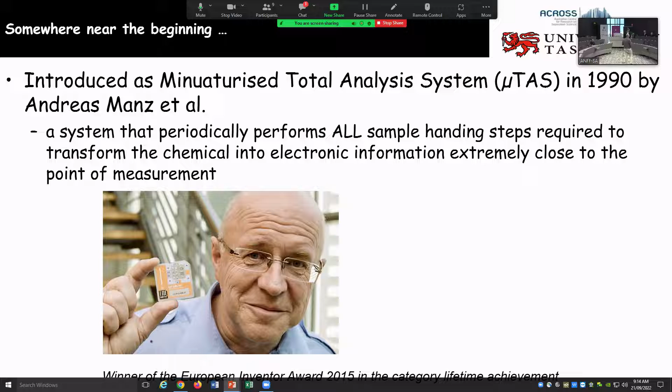And in that you're going to have lots of little people, and those little people are going to be doing all the things that you would do in a chemical laboratory. So that's the dream, is to take that integration of what happens in the microelectronics industry and do exactly the same for the chemical and microbiology industry, because if we can do that, we can save the world in so many ways.

There's a few reasons why we want to do this. If we scale everything down, it becomes so much quicker, because obviously if you run a kilometre race, it takes longer than running 100 metres, and it takes less time to run 100 metres and less time to run 10. So if we make everything smaller, everything happens quicker.

Because it's really small, it's really portable, so we can take it wherever we want. It's hopefully really cheap if we can scale up all of those things from the microelectronics industry, which make our mobile phones and computers really cheap and usable today.

We can use really tiny volumes, and by tiny volumes, we're talking microlitres or even nanolitres. We don't need to sample hundreds of litres of something, we only need very small amounts, and that's really advantageous if you have something where you only have a really small amount, such as inside a cell. Ideally, if you get all of this right, it can be used by anyone, anywhere, at any time. That's the dream. The reality is that we're often a long way away from the dream, but we are getting closer.

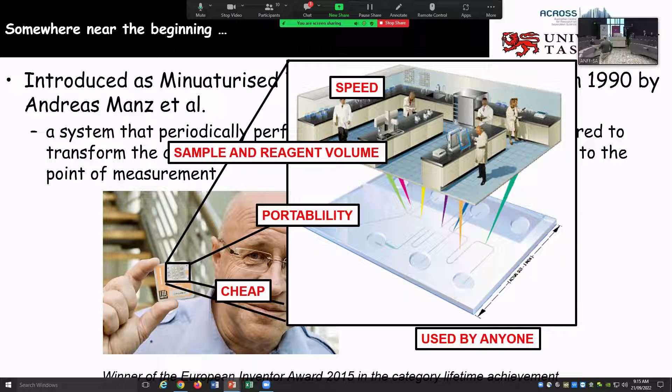This is all real-time, so it now gives you the chance to monitor brain chemistry in real-time. Because it's really quick, it's real time. Because it's really small, you can actually stick it in a little backpack on the rat. And because it's really small, it doesn't use very much of the rat's fluid to be able to do that. So all of those advantages that I talked about.

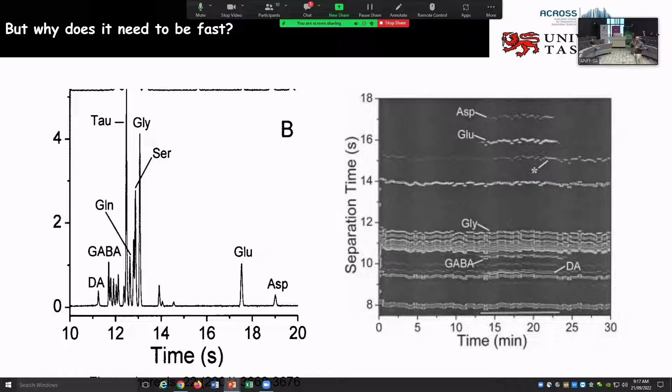Now, I don't know about you, but I don't have $500,000 to build one of these. I'd like $500,000, but even if I had it, I wouldn't build one of these, I'd do something else. But if you're looking for life on Mars, this is the only way we're going to get there, because all the other stuff they've sent so far is not fit for purpose.

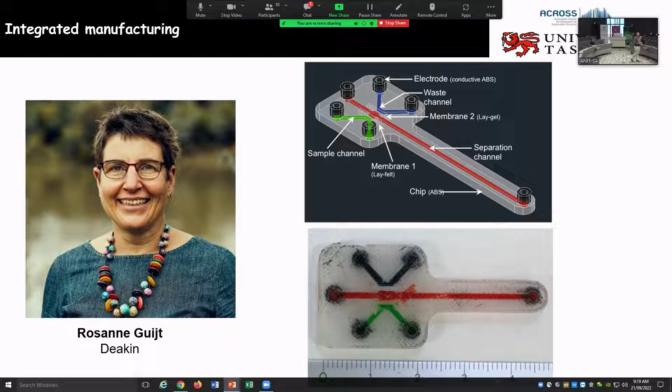This is some work we did with her on 3D printing, being able to manufacture something with 5 different materials in it at the same time, which means we can actually eliminate a lot of the manufacturing steps, some of which you'll see at ANFF here today. The only problem is we can generally make 1 or 2 of these at a time, as opposed to what you'll see here, where you might be able to make hundreds at a time. So different scales, but perhaps different purposes at this point in time.

One of the other major challenges is how to move all of these things that we want in there—fluids, in particular cells.

There's also some other unique phenomena that occurs around surface fouling, so that you don't have any problems with protein sticking, which is also a pretty neat byproduct of what they were trying to do.

An even easier approach is to use something that has been around for decades, and that is capillary action. In my field as an analytical chemist, we used to do paper chromatography. You've probably all done that, where you put a drop of ink on a piece of paper and put it in some liquid and the colours run off the page, and you can separate black into blue and green and yellow. Same thing here.

We can do exactly that same process and use the capillary forces in the paper to move fluid. Paper chromatography was old in the 90s, and then someone decided to do this for microfluidics, and all of a sudden it became really popular.

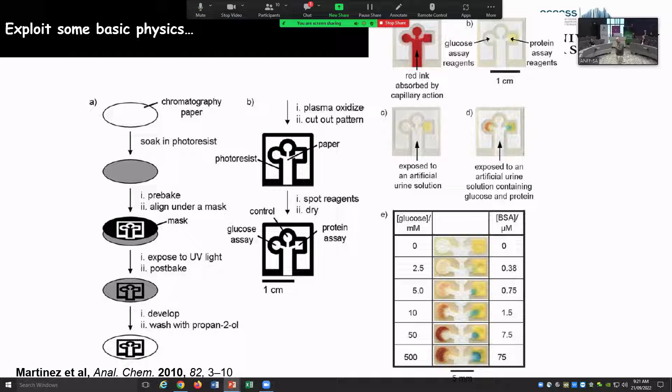There are some things, though, that I don't think you'll ever be able to do on paper. Maybe I'll be wrong, but I think paper does have some limitations, though it is still useful. This is one of my favourite papers.

So when you put blood on there, it will now tell you whether you're A positive or O positive or A negative. I don't know all my blood groups, I don't know what they all are, but the paper will tell you. And that's really neat, because if you're in an emergency situation, you don't have to interpret—you can just read the answer, right?

It's completely intuitive. And they've also extended this now to heavy metal detection. Depending on what you can see—if you can see the colour, if you can read the copper—you've got a copper problem.

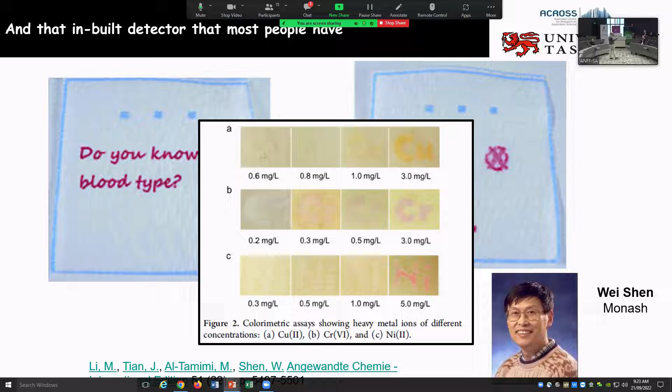So again, making really simple, really intuitive measurements using our eyes here. We get rid of all that lab-on-a-chip-in-a-lab syndrome, because we are the lab, right? We've all got eyes, and the other thing we've all got these days are mobile phones.

Conor Hogan at La Trobe started using a phone to do a lot of these things with microfluidic devices. In this case, he's doing light generation using the audio output from the phone. That's more of a problem these days, given that most phones don't actually have an audio output anymore, it's all Bluetooth. Then using the camera and also the audio input to get the measurements back in.

That's really cool, but the problem, as I've alluded to, is that as phone makers keep changing the phones, we've got to keep changing how we use them, and that's challenging sometimes for us to just keep up with how things are changing.

That's really neat because you can do things like look at really small things up close and have really bad pictures taken, like Craig is illustrating there wonderfully. Doing that, you can do some liquid extraction. Craig has done work extracting minerals from a water processing stream into an organic acceptor stream, maybe being able to use this for mining or refining purposes.

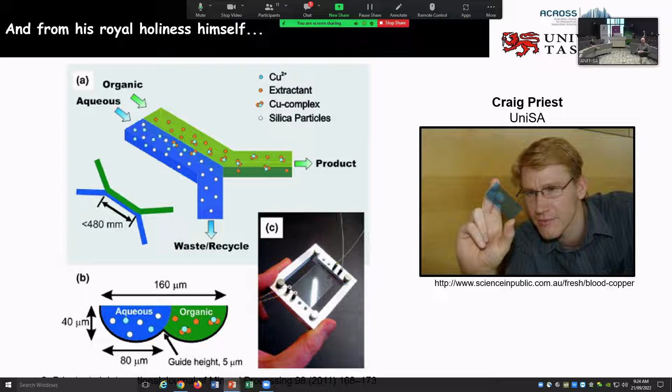And then you go, well hey, it's really small. And actually, it doesn't matter if it's really small, I can make a billion of these really easily. So then I can get to large scales, and my physics, my laminar flow, stays exactly the same.

I saw this first, I think, in about 2005 or 2006, and at that time the first babies from this had been produced. The company, I believe, did spin out after that, and I think it's still successful, but I honestly haven't kept track of that side of things. Still, I think it's one of my favourite examples of really simple fluidics.

It gets more complicated than that, and because again it doesn't mix, we can do things like creating an artificial spleen. This is for removing bad things from blood. We can put something in there that has a magnetic particle on it, which attaches to the bad things, the pathogens, the toxins, and using a magnetic field we can strip them from the blood into that acceptor stream.

Because it's laminar, the blood just goes straight back out again. We don't have to dilute it, we don't contaminate it, and it's really neat.

This was actually funded by a very large grant in the US for military use. How do you treat someone in the field? It has to be really small, really portable, really simple, right? You can't take ten litres of blood to give them an infusion, you have to use what you've already got there.

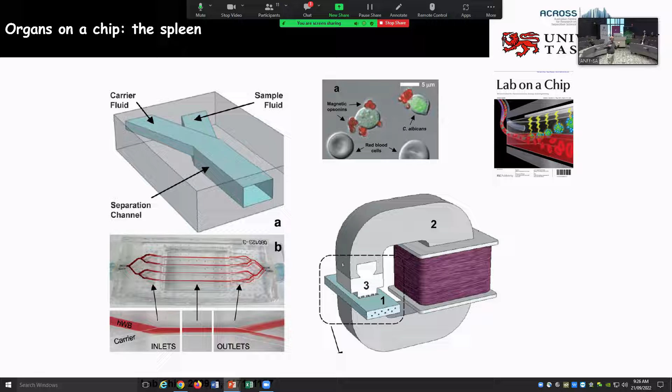That has spurred a whole new area now called organs on a chip, tissues on a chip, humans on a chip. The Human on a Chip project is designed to take every functional part of your body and put it on a microfluidic device, or a series of microfluidic devices, so you can connect them all together exactly the way they work in our body. Then we can start doing experiments not on people, not on animals, but on microfluidic devices. There's still a fair way to go, but we're getting much closer, and maybe one year I'll actually have a picture of what that looks like. It'll probably be pretty big for the moment, but I think before I'm dead we'll probably have that somewhere.

In Queensland, in terms of tissues on a chip and culture on a chip, Justin Cooper-White is doing some really nice things with stem cells. These were very interesting about a decade ago - one of the neat things they were doing was looking at how stem cells evolve. They would culture stem cells in a series of chambers all interconnected, and as the first stem cells would change, the chemistry those cells released would influence how the next cells evolved and changed, and the next cells after that. So they were looking at how stem cells evolve into different types of cells in our body, and how the previous cells or the microenvironment around them influences that. That's really easy to do on microfluidic devices because we can look at individual cells, control all the chemistry nicely, and cascade them in any way we'd like.

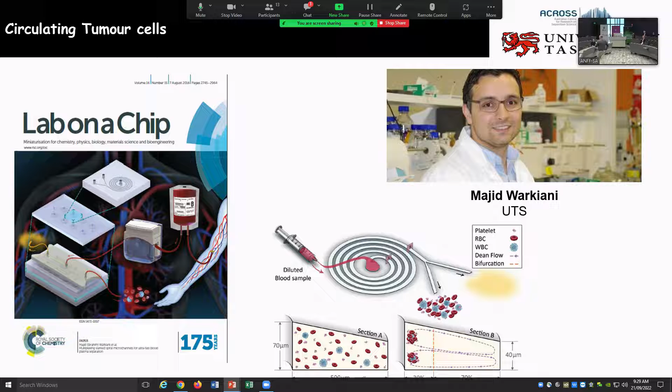Also speaking of cells, Majid Warkiani at UTS has been doing some really nice work on circulating tumour cells. These have been recognised as an important part of the spread of cancer, particularly after you've had surgery and had your cancerous tumour removed. What they have now is a device, or series of devices, that have been commercialised to actually remove all of the circulating tumour cells from your blood after surgery. They'll connect you up to about 10 microfluidic devices stacked on top of each other, and over the course of a couple of hours your entire blood is filtered through this, removing 100% of the circulating tumour cells to hopefully stop and minimise the risk of the cancer spreading throughout your body. That's commercial - I don't know how viable the company is, but I think they'll do really well because it's a market that's not going to go away anytime soon.

Also separating particles and cells is David Inglis at Macquarie, using what's called little posts. These posts are offset and called bump arrays, because as your particles follow flow streams and hit a post, it moves a little bit to the side. So you progressively bump particles of different sizes into different parts of your device, and you can separate particles based on size.

Recording stopped. Uh-oh, what did I do? Wasn't me, I didn't touch anything.

We can even do chemistry too, so that's all around particle analysis. This is a really old example now of doing chemical reactions in microfluidic devices. That's nice because as you scale everything down, everything gets quicker - reactions that take hours can now be done in seconds. We can do them in series, adding different reagents at different time points, and automate the entire chemical synthesis process.

Hey, you broke my slide changer. What did you do? Sabotage - I was giving them nice compliments about being professional. Yeah, you probably deserved it, Michael. Is it working now? Yeah, it's working now.

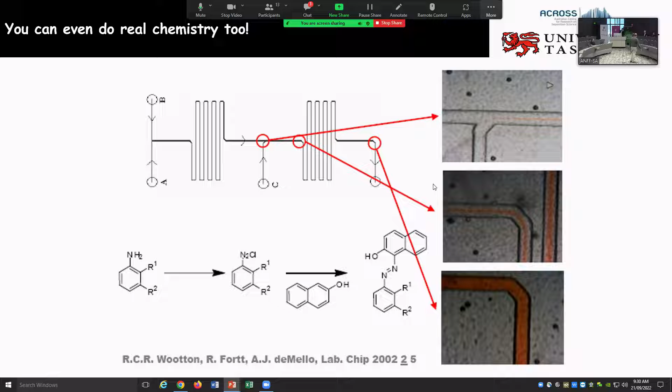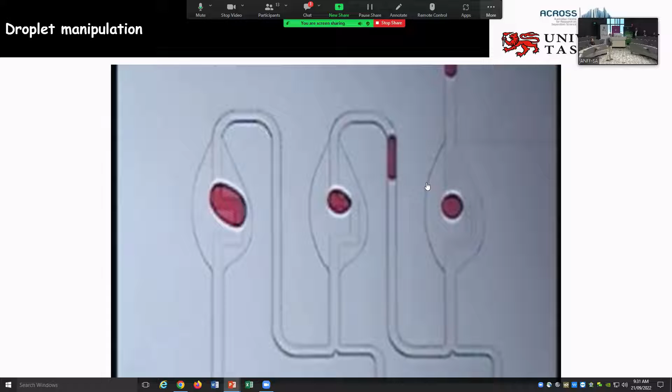You can capture drops—1, 2, 3, 4 drops, however many you want—and then sequentially release these drops or access whichever ones you would like. So you might do some reactions, and whichever one shows the products, you can access and analyse or do something else with.

And you can't just do that on one, you can do that on millions of drops. So the droplet rate, the rate at which droplets are generated, is typically 100 drops a second, up to about 1,000 to 10,000 drops a second.

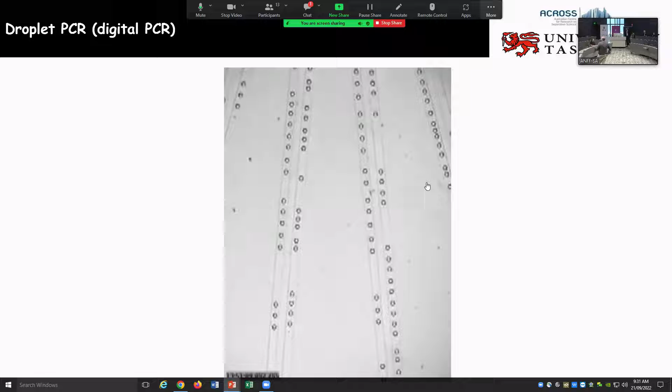You can do individual reactions in each of these droplets, which is pretty exciting given that each of them is completely separate until you decide to put them all together again. We decide what happens by the design that we use.

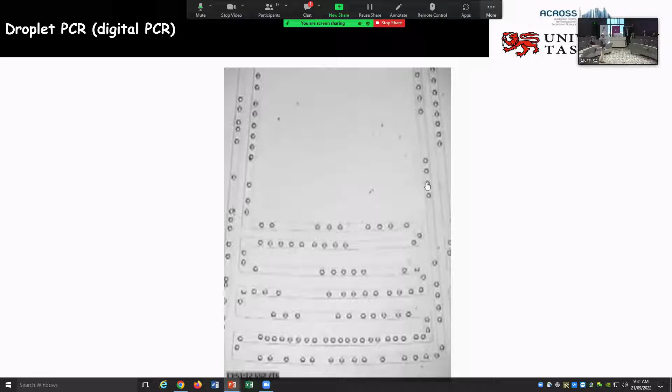One of the areas this has become really important is DNA testing. One problem in a rape case, for example, is trying to find that 1 or 2 sperm cells among millions of female epithelial cells. If you separate each of those cells into its own droplet and do the analysis on each droplet, you remove a lot of the background and make identification of the sperm cells, or finding the male DNA, much, much easier.

That's come out of Berkeley, is currently commercialised, and I think is also going to be a really good product because they're not going to go anywhere soon—the number of bad people in the world doesn't seem to be getting less despite our efforts to make it so, which is a little bit of a sad reflection, I think, in many ways.

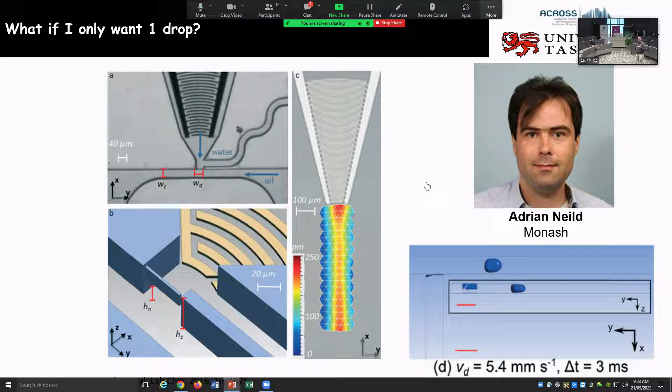If you only want 1 drop, Adrian Neild at Monash can help you with that. He uses surface acoustic waves from little electrodes, and by actuating those at particular times, you can produce 1 drop, 10 drops, however many you want, whenever you want. This is a different way of making drops, and then you can do all the other manipulations with them that I just talked about.

Also using acoustic waves is Leslie at RMIT. He's done a whole heap of things with surface acoustic waves. This is one of his earlier works, looking at centrifuging stuff, but he's done a lot of work recently in terms of droplets.

Recording in progress. How much time do I have left? I won't ask Craig, maybe I should ask Belle. Seven minutes, right? Okay, I think I'm nearly at the fun stuff anyway.

Also on droplets is Nam Trung at Griffith, who's doing some interesting things with liquid marbles. The example on the right is a drop of liquid that balls up on the surface because it's hydrophobic, and he then coats that in nanoparticles, which creates a liquid that's completely impervious.

You can then use a magnetic field to move these all around—you can use magnetic particles or a magnetic fluid. The one I saw with magnetic particles, you could actually make the particles all come down on the side of the droplet, so you could access the fluid, and then when you take the magnetic field away, the particles go back up again and seal it in.

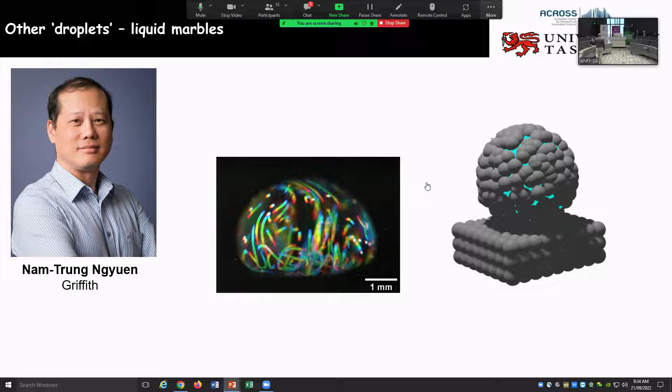Really neat stuff, but I can't find the video, so I'm going to have to contact him and see whether I can get that from him—if I ever get to do this talk again, which I probably won't because I'm bagging Craig out too much.

And so that's the basics of microfluidics.

Now I've got about 5 minutes to show you some other stuff that I think is really cool, but I'm going to give you the choice. I've got jump to end, so we can stop and pass on to Allison, or electrowetting drops, pyramids, robots, or screens. What would you like to see?

Who wants to see anything? Which one do you want to see? Someone tell me something. Robots. Robots, awesome choice. My favourite—well actually they're all my favourite, otherwise I wouldn't have them here, right?

I love the funky music. It's not my first choice.

This has come out of Harvard and the Whitesides group. It's a soft robot, the Octobot. Maybe I'll stop.

Oh no, I missed my acknowledgement slide. Can I jump to that? I of course always need to acknowledge the funding for people letting me do fun things like come here and talk to you, and that's primarily the Australian Research Council. And of course I need to thank Craig for continuing to invite me, even though I keep bagging him out every year and going harder and harder, and he still keeps inviting me. So next year I've actually got to go even harder again. And to Belle, who organises everything exceptionally well, and I don't think it would run if it wasn't for her, even though Craig thinks he's an important person.

So thank you very much. If there's some questions, I will answer them as best I can. Thank you, Michael.

You always forget. Thank you for your wonderful talk, but we would like some questions as well. So I'm just going to eat chocolate. No, I'm not going to eat biscuits. Ask Michael how to make an octobot - I don't know how to make one. Craig knows how to make an octobot. The team here knows how to make an octobot, not me.

We haven't had a question, but we have had a comment saying very cool things. Go, praise that. So there must be a question. Let's try and get one out for somebody. I guess I'm not a chemistry or a biology guy. I love that flow. Curious, we've got two mixtures side by side and they're not mixing. You still get a good bit of molecular interaction on the interface of the two?

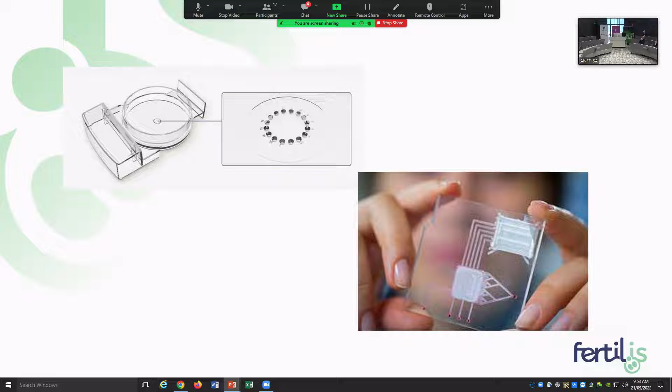Two-photon polymerization 3D printing solves these challenges.

So what's 2PP? It's based on two-photon absorption, 2PA. Essentially this is a nonlinear optical process, and what it does is it reduces the amount that is polymerized by the laser. So we use photosensitive material and a laser, and that polymerizes right at the focal point. Unlike one photon, 2PA gives us really, really small nano building blocks, which we can then use to build up a very precise structure from.

There are two types of printing modes, VAT mode and bottom-up mode. For simplicity, I'm going to describe VAT mode, which is shown here. For those familiar with filament 3D printing, it's conceptually the same except upside down. We print our part directly onto a substrate. The substrate is connected to the stage, with XY movement that allows us to print the full section of the layer. We have our Z objective, which is like our printer head, which moves up and down, allowing us to print layer by layer the different part.

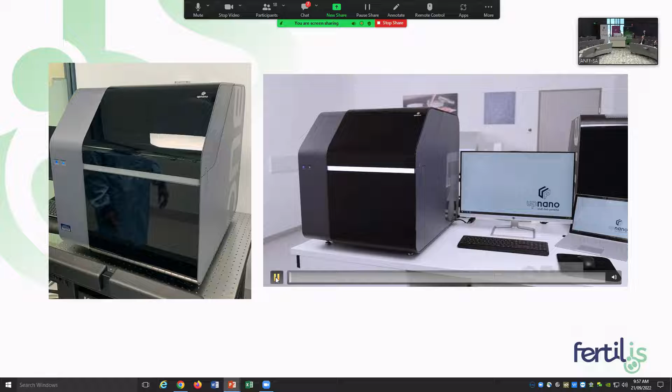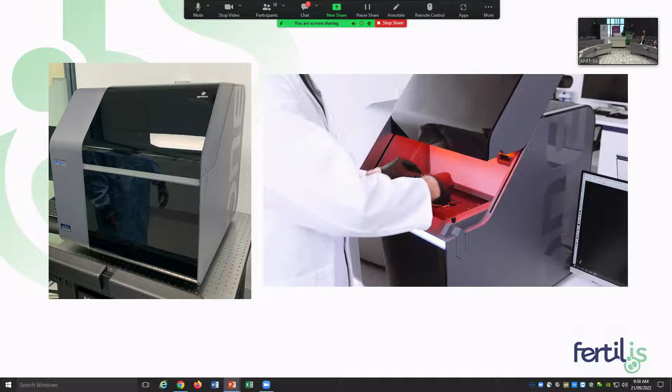Selecting an objective, placing it into the machine. The next step is to place the vat in position and then fill it with your selected material. The stage is inserted, and our substrate is that small glass piece in the middle that's positioned on the stage. It comes with software that allows you to set up your print. And then we can see the part being retrieved from the bottom here.

The Nano One is fast, with up to 100 times higher throughput for production cycles. It supports scan speeds of up to 1,000 millimetres per second and throughput rates of 450 cubic millimetres per hour, enabling both prototyping and production. It's not just the fastest in the market, it's fastest by far — it can print in 5.5 minutes what a competitor technology prints in 163 minutes. That's pretty impressive.

The Nano One comes with a range of different objectives, allowing for a range of different print sizes, as well as fine mode and coarse mode. So we can print all the way down to the 200 nanometre range, up to mesoscale parts. The laser wavelength is also compatible with cells, enabling biological printing approaches too. It supports several materials, and importantly for us, there are two biocompatible resins. It comes with proprietary software, similar to any other 3D printer, that allows you to set up your part and printing parameters.

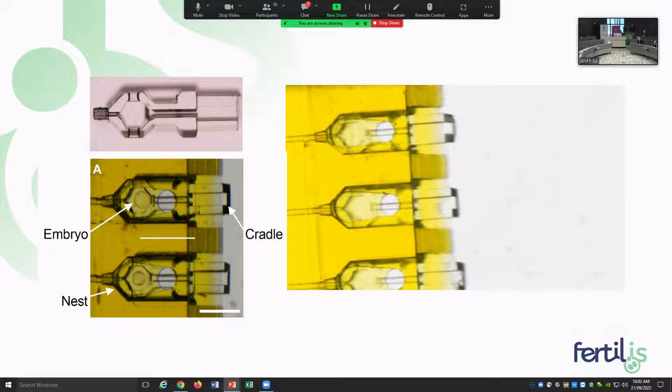This is easily my favourite part. This has to be the world's smallest microfluidic barb — 90 microns in diameter with a 30 micron nozzle. The smallest microfluidics I've worked with is 1/16 inch, so 1.6 millimetres. Stand out, this is pretty good.

We ran a computational fluid dynamics simulation to work out how the flow would go through the nozzle and then fill the cavity. What we were looking for was how the distribution of flow would work. We printed these parts on the Nano One and were able to test for fitment — how it interlocks and holds in place. We were also able to run a polystyrene bead to have a look at the flow.

Amassing images, we were able to generate this. We were pretty happy with the alignment of what we saw experimentally with what we achieved through CFD. From an applications point of view, this is really important — we're able to make sure that the embryo is evenly perfused. We're also able to substantially slow the velocity of flow, which ensures there's very little shear stress being applied to the embryo, and that's important.

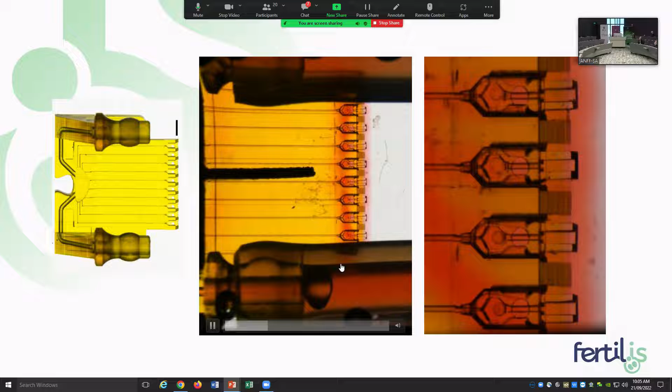This system is under flow. For reference, this is a 1.3 millimetre ID tubing. We're using a red dye to visualise the flow through the channels, and we can see the flow coming through here, but the cradles are all securely interlocked into position.

We can also see the level of control that we get out of this system. So here we're perfusing and we turn off the pump. We can see the embryos move to the left. We then subsequently turn the pump back on and we can see the embryos again shift to the right.

A few specs on the nest: it was printed in vat mode again, but this time with a 10 times objective and an air immersion medium. We were using UpNano's high-performance polymer UpPhoto, with laser power settings ranging between 50 and 100 milliwatts. Adaptive resolution printing mode was used, which achieved 4 hours and 31 minutes for one complete, fully cured part.

As with the cradles, the nest was post-processed in sequential immersion of 3 consecutive isopropanol baths. In addition, we were flushing each of the channels with isopropanol using a pump up to 3 bar. This level of precision has only been made possible by the use of 2PP.

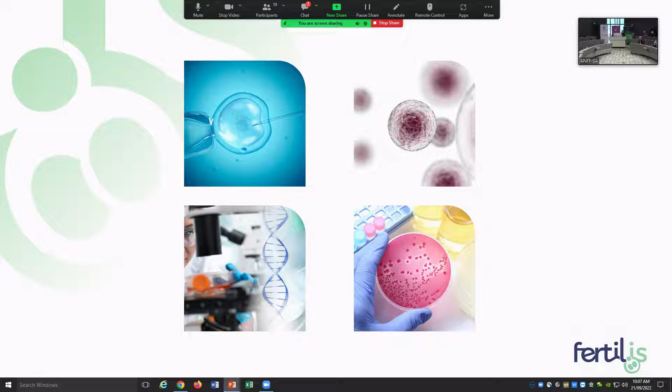Really amazing work that you're doing there at Fertilis. Exquisitely precise, and hopefully inspiring a few ideas around the room about what we can do with this new 2PP capability here at ANFF SA.

I would like to invite questions for Allison. Any questions? There's always a question, it's just whether it gets asked. All right, I'll ask a question.

So what about your journey? I'm really interested to know. It's 20 years of experience we're talking about, and you find yourself at Fertilis, which is a company that's growing very quickly, with great opportunities and wonderful technology. Can you say something about that, and also you're in Australia, which is the other thing I wanted to mention, and in Michael's presentation a lot of the researchers showcased were Australian researchers. So could you say something about microengineering in Australia and your journey, and share a bit of that?

Yeah, absolutely, I think it's really exciting. The amount of work that we do in the medical device space in Australia is fantastic. There are lots of hubs specialising in IVD or in microfluidics, and I think having the microengineering setup here is phenomenal. It's really exciting, certainly compared to many, many years back what we had at uni. The kind of access is fantastic, and it really supports innovation and being able to rethink how we do things, so that rather than just applying old techniques and old processes, we can really reconsider how these applications need to be solved.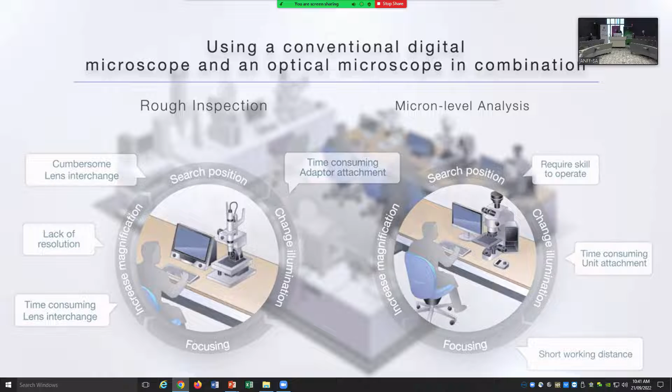The DSX-1000 all-in-one digital microscope is the tool of choice for inspection and failure analysis. With speed, flexibility, guaranteed accuracy and repeatability, and high-performance imaging software, you can be confident in your results. The DSX-1000 system has features that enhance the speed and efficiency of your workflow. Instead of having to use one digital microscope to conduct an initial low magnification inspection and a second for high magnification detailed analysis, the DSX-1000 enables you to do both on the same system. And unlike some digital microscopes that require time-intensive lens changes to switch magnification, the DSX-1000 system's quick-change lenses enable you to complete your inspection fast. Three key values for workflow innovation.

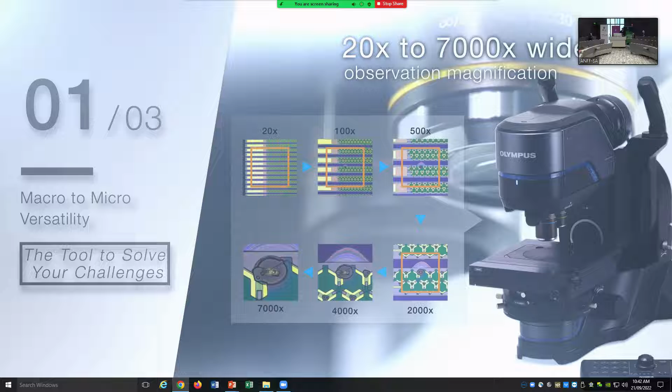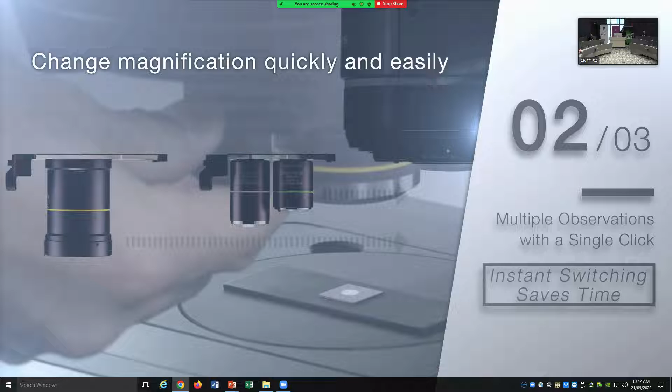During analysis, the system's suite of advanced features enable it to excel in many applications. A magnification range from 20 times to 7,000 times enables you to view a wide area before zooming down to the micron level for detailed analysis. A range of lenses is available, including for high resolution and long working distance, while the rotating observation head and stage let you view your sample from almost any angle. Multiple observation methods are also supported. The Best Image function enables you to view your sample under 8 observation methods on one screen, so you can quickly choose the one that works best. And all magnifications are available in every observation method.

High-resolution 3D images are also possible, with speeds up to 10 times faster than the previous DSX model. Unlike some digital microscopes, the DSX-1000 system's measurement accuracy and repeatability are guaranteed, so you can be confident in your results. The telecentric optical system corrects for the convergence effect that can make the size of an object look different depending on the focal point, greatly increasing measurement precision.

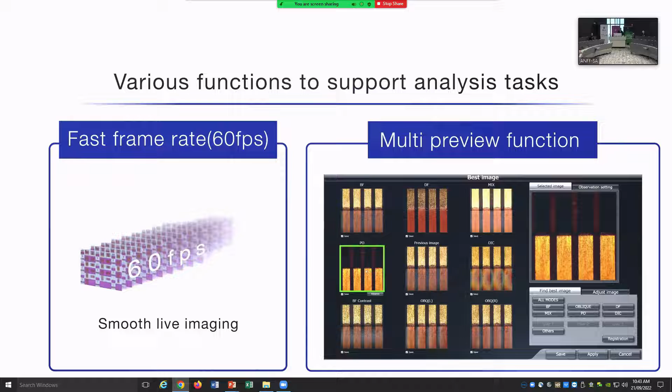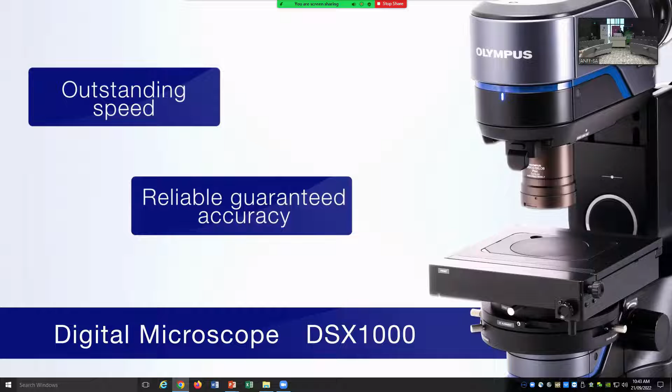These features are just a fraction of what the DSX-1000 digital microscope can do. The DSX-1000 incorporates a variety of functions to support analysis tasks. In pursuit of ease of use, speed, and accuracy, the DSX-1000 all-in-one digital microscope contributes to the reduction of analysis time and workspace. To learn more, please visit us at www.olympus-ims.com or contact your local sales representative.

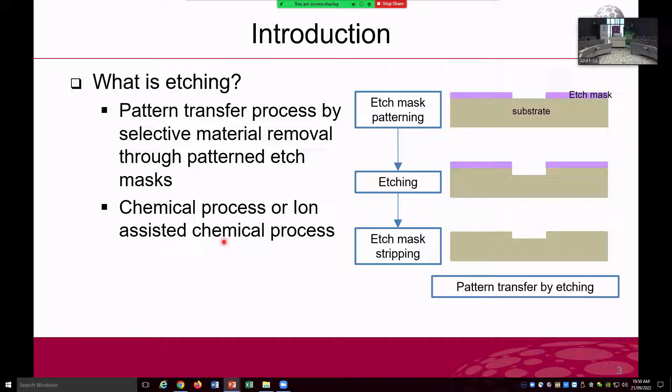Why is etching so popular in micro/nanofabrication? I would like to suggest two answers.

First, etching is substantially a non-contact material removal process. That means you do not need to worry about frictional heating caused from contact between workpiece and tool, or about deformation of your workpiece. All of this can produce highly accurate and high resolution features through an etching process.

Another beauty of etching is that it's a wafer level process where material removal occurs all over the wafer, and this can easily be extended to a batch process. Through a well-developed etching process, you can achieve very high uniformity and repeatability in etched structures. Etching can also be a very fast and cost-effective option for microfabrication.

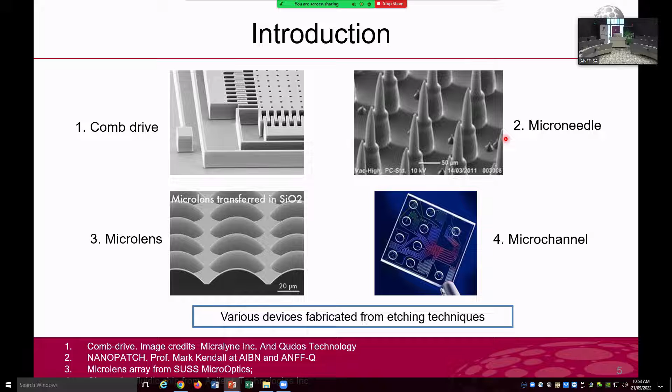Now we need to look at some theories and underlying mechanisms in etching. There are two etching mechanisms used in this process. The first is the chemical etching mechanism, which most of you are probably familiar with.

The chemical etching mechanism makes use of a spontaneous chemical reaction between the etchant and the surface material. To make this surface reaction sustainable, you need a continuous supply of etchant at the surface, and you also need to remove the etch product from the surface. These are the three basic steps that must occur for a chemical etching process to proceed.

The physical etching mechanism is relevant to reactive ion etching. It involves the generation of ions in a plasma, acceleration of ions toward the target surface, and breakage of atomic bonds on the surface to remove material.

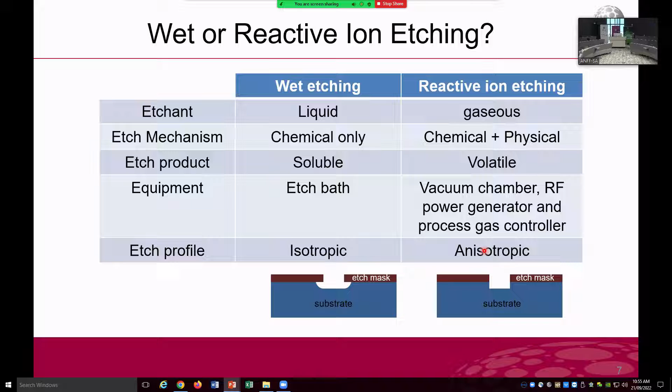Let's have a closer look at wet etching—I'll skip some parts due to limited time. Wet etching used to be the dominant etching technique in IC manufacturing because of the simplicity and economy of the batch process, and isotropic wet etching leads to isotropic etch profiles.

Because of the dimensional shift between the etch mask and the final etched pattern, wet etching has limited capability in achieving high resolution features. That's one critical limitation. Another limitation is the maximum aspect ratio, which for wet etching is about 1 to 2.

That means when etching a trench structure, if the width of the trench is 2 microns, then the maximum depth is about 1 micron—you can't go much higher than that. That's the maximum aspect ratio achievable from this isotropic process.

This shows the wet etching profile. This SEM image shows the isotropic wet etch profiles formed on a borosilicate substrate by using hydrofluoric acid. This is an isotropic etchant, with chromium gold as the etch mask layer.

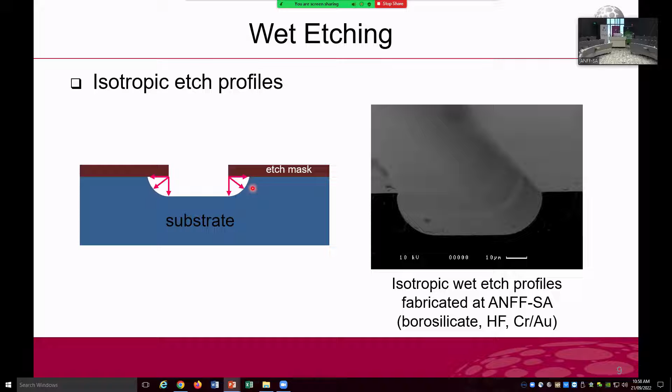As you see, in isotropic wet etching, the etch front proceeds as a spherical wave, so etch rates are equal in all directions, horizontal and vertical. That's the reason we end up having these round etch profiles. The maximum aspect ratio is about 1 to 2.

This wet etching can sometimes be anisotropic. It's a very interesting topic. If silicon crystal plane anisotropy is used, then wet etching of crystalline silicon can be anisotropic. What is this crystal plane anisotropy? More specifically, it's a crystal plane atomic density anisotropy.

If the etchant is correctly selected, it will selectively attack certain planes with minimum damage on other planes. That's the underlying mechanism of achieving anisotropic etch profiles on a crystalline silicon structure.

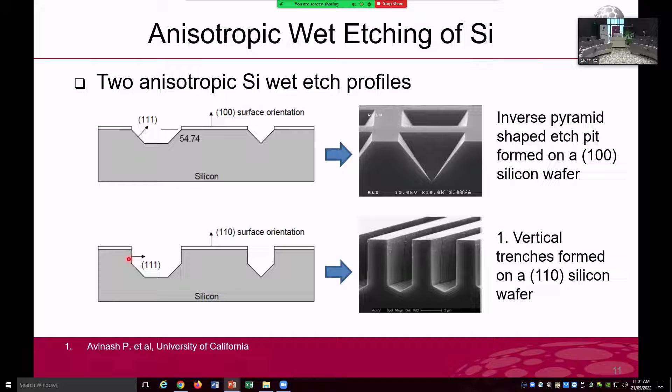Now it's time to move on to reactive ion etching. Reactive ion etching basically combines chemical etching mechanism with physical etching mechanism. This is currently the dominant etching technique used in IC manufacturing. This technique dictates the density of devices and the critical dimension of devices, I should say.

Because of this directional etching capability, there is a minimum dimensional shift between the etch mask and the etched features. You can achieve high resolution features, and also high aspect ratio features. You can make very narrow and very deep cavities by using this directional etching technique.

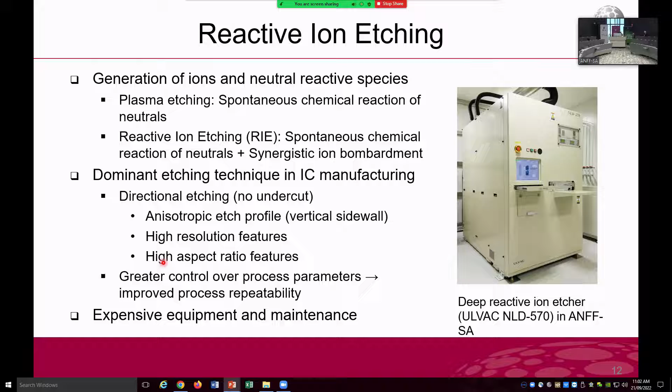In the sputtering process, we also learned about plasma, I believe, but that's a different plasma, I would say. Let me explain that further in this slide, which highlights the electron-atom or electron-molecule collision process.

There are various collision processes, like excitation. A high energy electron provides energy to an atom, and a bound electron is excited and jumps up to a high energy level. This excited state is very unstable, and the electron returns to the ground state. During this transition, a photon is emitted, and the energy of this photon corresponds to the energy band gap.

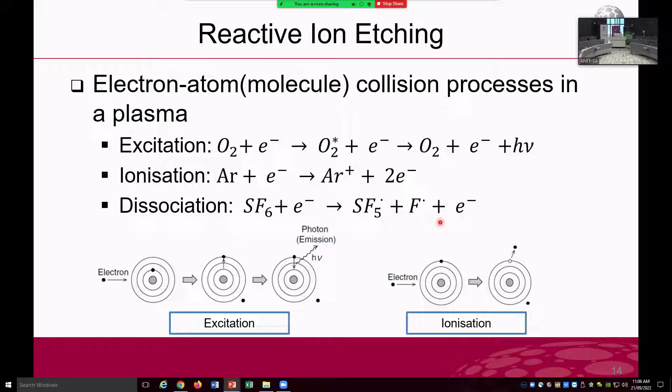After reaction, the difference becomes clear. In dry etching or reactive ion etching, the dissociated molecules or radicals must generate etch products that are volatile, with high vapor pressure—otherwise the etch product is hard to remove and slows down etching. But in PECVD, the product should be involatile, because you're actually trying to collect it as a deposited film. So plasma is used in sputtering, reactive ion etching, and CVD, but its aim differs depending on the application.

In reactive ion etching, there are two approaches to enhance etch rate in the vertical direction. The first is ion-assisted chemical reaction using directed ions: after generating ions in the plasma, we direct them toward the target surface so they collide vertically. The sidewalls are not bombarded by this ion irradiation—only the horizontal plane is irradiated by these vertically directed ions, which enhances the chemical etch rate only on that horizontal surface.

Using this ion-assisted chemical reaction process, we can improve etch rate in the vertical direction without causing etching on the sidewalls. That's one way of implementing vertical sidewall anisotropy in reactive ion etching. Another way is passivation of sidewalls. This ion-assisted chemical reaction may or may not occur depending on the combination of plasma chemistry and etch target material—if it does occur, you simply rely on it; if not, you need the sidewall passivation technique, which I'll discuss more in the context of deep reactive ion etching.

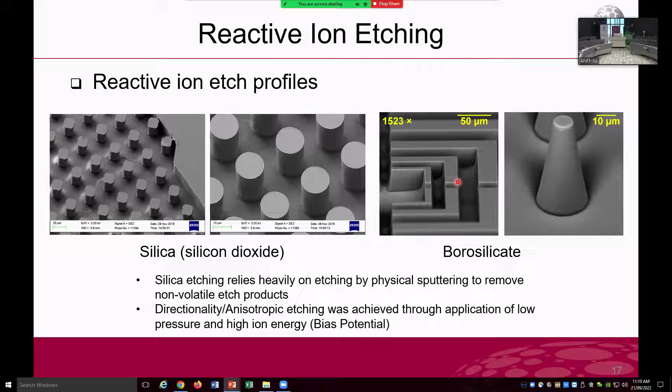Now let's talk about deep reactive ion etching, a second way to achieve vertical sidewall profiles using sidewall passivation. In this process, the first step uses an etch mask pattern and fluorine as the etchant, since fluorine gives a very high etch rate. But the problem with fluorine is that the etch profile is only partially anisotropic—if you keep etching with fluorine alone, you end up with a rounded profile that isn't fully isotropic but isn't desirable either.

To overcome this, in the second step we introduce a passivation layer by coating with C4F8, a fluorocarbon gas. In the next etching step, the vertically directed ion bombardment removes this fluorocarbon protective layer from the horizontal surface, while the coating on the sidewalls remains intact. Silicon etching then proceeds again. By repeating this cycle of etching and passivation, you can achieve globally vertical etch profiles.

Was it the whole screen? Yeah, good to go, hey? No, the whole screen. Just want this one. Oh, just the PowerPoint. That's probably better, no worries. Okay, all good. All right.

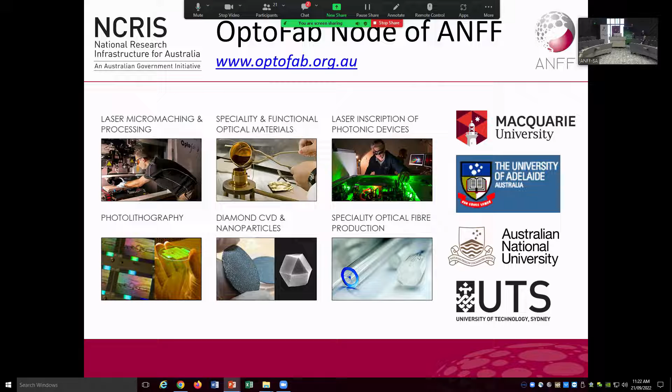What's new in OptoFAB in the last couple of years is that we also have some glass 3D printing, which is a new tool at Adelaide. Hopefully Heike shows that off, it's a very interesting emerging area. They've also got some nice new Stratasys printers for doing composite plastic printing and things like that.

So there's a real hive of activity down there. And hopefully you'll also get a chance to catch up with Evan, who's the machinist there.

I'd encourage everyone who's come along this week to use the online materials available to watch Mark Sherrill's presentation, which he's devastated not to give this year, about the machining work done here at UniSA. There's a sister facility at University of Adelaide where Evan will show you the DMG mill, where they can do freeform glass machining and some really good stuff.

One of the new activities we're very excited about is the resumption of precision optics manufacturing in Australia, looked after mostly at ANU by Steve Madden. He's recommissioning tools that were under CSIRO's remit for many years, the sort of tools that built the mirrors for LIGO, the gravity wave interferometers.

But Steve's also taking on additional tooling in collaboration with DSTG to do some interesting freeform optics and things like that. ANU will be opening a new fab similar to what UniSA has done here, down at ANU in the coming weeks. So that's a very exciting development.

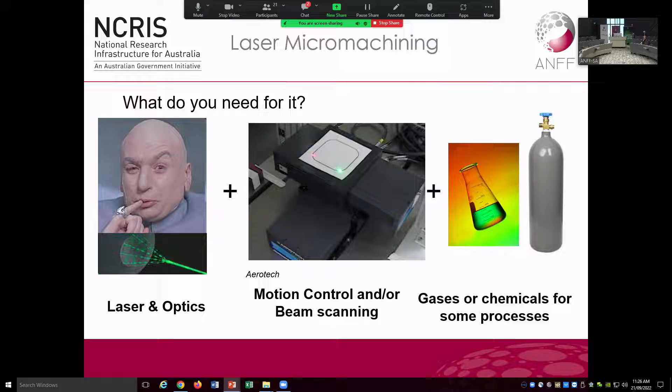Coupled with your laser, you need very precise motion and beam scanning - you want to fabricate stuff on micron scale or with micron tolerances, so you need your hardware to be very good. There's a whole other area of science in motion control. The company I'm showing here, which we largely stick with, is called Aerotech - an excellent motion control company, though there are several others. You usually need to pair these together: a laser company, a motion control company. Then there will be other gases and chemicals that assist the process depending on what you're doing. So those are the basic ingredients.

In regards to the common types of lasers you'll see around in workshops, everyone is probably familiar with a CO2 laser. I have an example here from a nice CO2 laser company, Trotec. These are essentially a 9 to 10 micron laser - the laser is essentially just a precision heat source when you're doing this sort of cutting. You can buy them off eBay now for about $500 for your garage if you want. CO2 lasers are really common, really cheap. The thing is, though, they're not really suited to the micro/nanofabrication we're talking about, but they can do some great stuff.

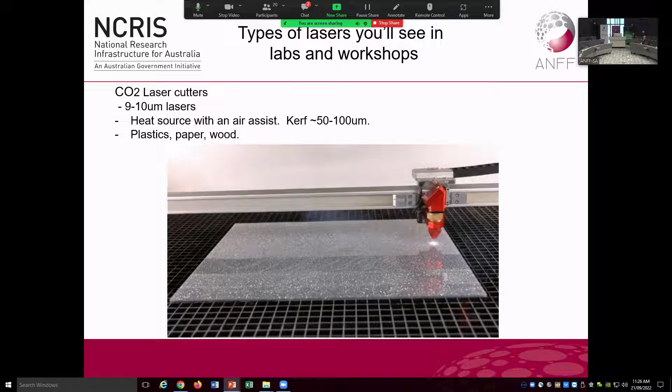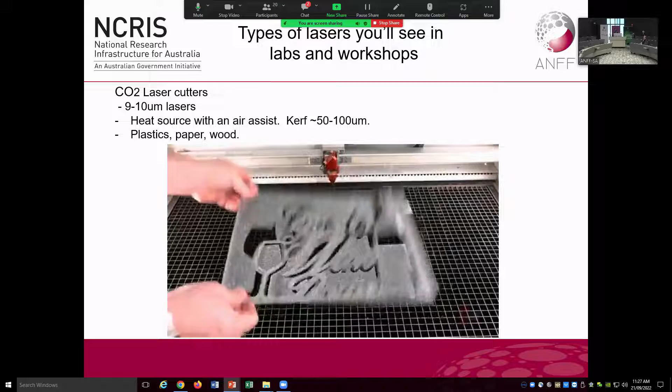Here it is just cutting up a sparkly piece of acrylic for a bit of signage. That's where a lot of these gantry CO2 systems will sit - in sign makers' workshops and things like that. So when people say lasers, CO2 comes to mind, but it's not really useful for what we want to do in micro/nanofabrication, though they will remain nameless.

We've had some students say, can I do this with a CO2 laser because it would be cheap? Okay, if you want to make 50 micron features of microfluidics with a CO2 laser, have fun with that one.

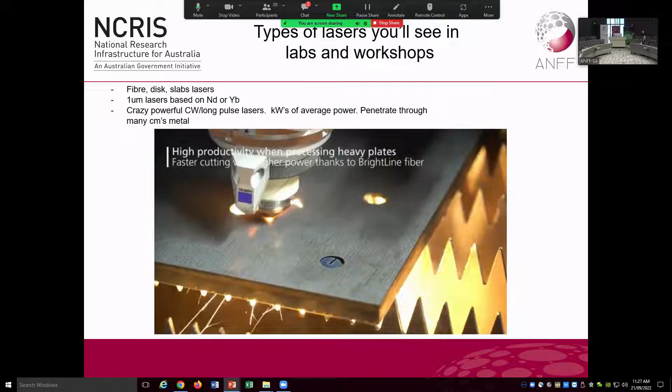The other type of laser that's really impressive to watch work are the kilowatt lasers, the slab lasers, the fiber lasers, which are used in heavy industry. These lasers are on a completely different level to what we're going to talk about. They're using the laser as a precise heat source, but with kilowatts of average power, and many bar of air blowing through the cut to blow the metal away. They're fantastic machines to see work. But the fine features we're trying to make would fit inside the kerf of these lasers, and would be easily blown away by the air assist on these systems. So what I'm going to talk about isn't really applicable to either of these industry standard areas.

Another application for lasers, which will be topical for your visit tonight, and which we also operate a similar system for at Macquarie, is laser sintering and laser melting. People have seen the beautiful 3D printed metal available now, largely made possible by laser-based technology. The clip I'm showing is a fiber laser galvo scanned from above, welding a layer of powder together to build up a 3D print. Hopefully Lejesh and the guys at Adelaide can give you a better look inside their machine this evening when you go along.

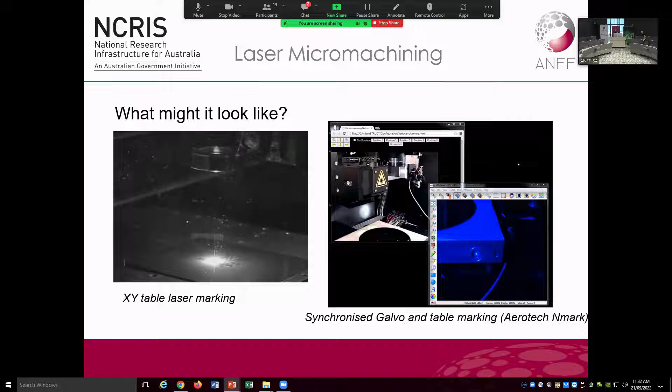The next system I have here is our current workhorse. We got this into the country around 2012. Let me just jump the video ahead a touch... Play. Yep, still going. All right, I will let that kick in, and now we should see some action.

So these days we're using a more sophisticated setup. DSTG liked this so much that Igor got one of these toys as well, sitting out at Edinburgh in Adelaide. So there's a few of these floating around now.

What we're doing these days, we're using more advanced laser sources, going to shorter and shorter pulse widths, and I'll describe in a moment why that is. But the systems themselves are much more sophisticated looking—they are really pretty sophisticated CNC machines. What you're seeing happen here is we're combining two different motion systems. We have the XY table down the bottom with the silicon wafer vacuumed onto it, but then we also have the galvo scanning, which are fast mirrors that are actually scanning the beam around. So these are the sort of combinations of CNC bits and pieces you put into these laser machines.

Right at the end, hopefully I have some time to show you some videos about where some of the companies that are at the leading edge of this are going with their automation. It's really quite impressive what people are getting to.

So this is a look at the machine that we run day to day these days and how it works. What's running there is just laser marking of a silicon wafer. We do get into processes which are a little bit more advanced, but this is a nice demonstration of the system working.

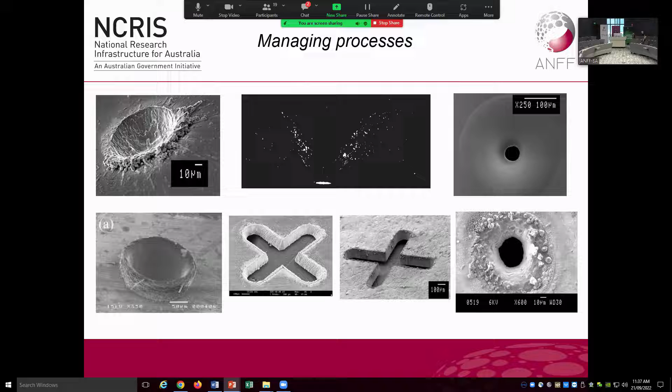What we want to do is take a process which might look nasty like this, where we've generated molten metal, and get it back to something with nice clean edges. There are a few ways we do that. One is with the CNC routine we use, but also the trend to go towards shorter and shorter laser pulses.

You'll see many diagrams like this floating around the internet when you look up ultra-fast laser processing, and these are mostly from people trying to sell you the laser. So they don't tell the full story, but it's partway there. I've got three of them just to show you an example.

This is one. They talk about having a nanosecond laser, with pulses of tens of nanoseconds, which is enough to conduct heat into the material over the duration of the pulse. So what they often say with nanosecond lasers is you're going to make a mess, ending up with recast material and surface debris. We're talking about lasers that get down to 10 picoseconds and lower, where the process, like I was describing with coulombic explosion, can be more dominated by ejection of atomized vapor rather than actual phase change in the material.

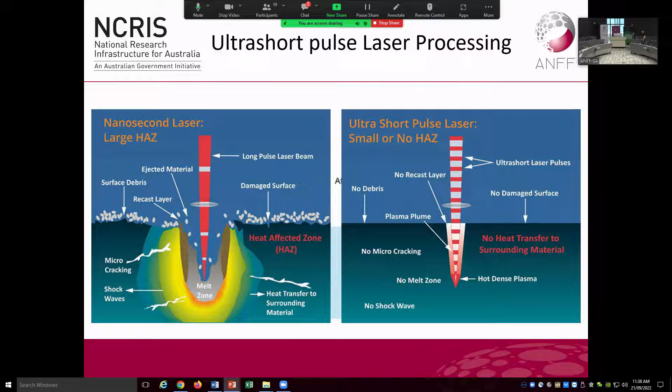The reality is it's not the full story. There's only so far you can push these processes. Just because you have a femtosecond laser doesn't mean you can process something with a femtosecond laser at hundreds of microjoules. At some point you'll still be putting so much energy into the system that you'll get molten effects. I have an example here from my work when I was looking at this, where we were looking at everyone's favourite substrate, silicon, and seeing what happened as we started to push the pulse energy up and up and up.

As you can see, we start off with these single pulse craters, which are beautifully smooth, not too much debris around. But as soon as we exceed a few joules per square centimetre, which is a measure of the dosage on target, we get a molten looking finish on the surface. We're clearly creating a molten surface in the silicon. So there's only so far you can push these processes before you run into problems which get you back into the same regime with nanosecond lasers.

For that reason, these ultra-fast processes are not necessarily super fast. Sometimes you have to be patient with your laser etching. One approach these days is to scan the beam extremely quickly using galvanometers and things like that, then use a lower energy but scan many, many dozens of times to get the feature that you want. That's where it differs from laser cutting.

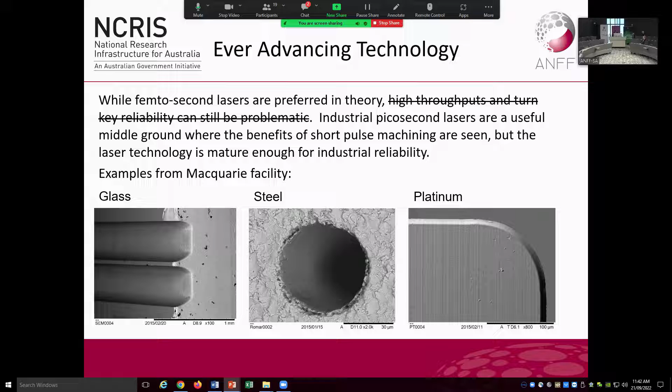So in regards to where we're going, in 2012 when we first got our laser, it was running a picosecond laser from a company called Lumera. Since then, lasers have come a long way - this is a market which is very rapidly advancing. So what we're going to be looking at doing next year is upgrade our old picosecond Lumera laser, which gave about 8 picosecond pulses, to a new class of lasers which have become mature in the last few years - femtosecond lasers which can scale up to 20 or 40 watts.

Now, 20 or 40 watts may not sound very large to you when we're talking about kilowatt fibre laser cutters. The thing is the peak pulse energy. So for 8 picosecond pulses, we're talking each individual pulse might have a peak power of 12.5 megawatts.

Okay, that's the instantaneous power on target. That's why stuff sublimates when we hit it with these lasers. When we go an order of magnitude shorter pulse, down to 300 femtoseconds, say, then we're up to 330 megawatts of power in each individual pulse. That's an instantaneous power that's going to break apart any material.

It sublimates stuff. Lasers like this are also being developed on much larger scales to do fusion ignition and things like that. There's really some exotic physics that's being done with these lasers that they develop.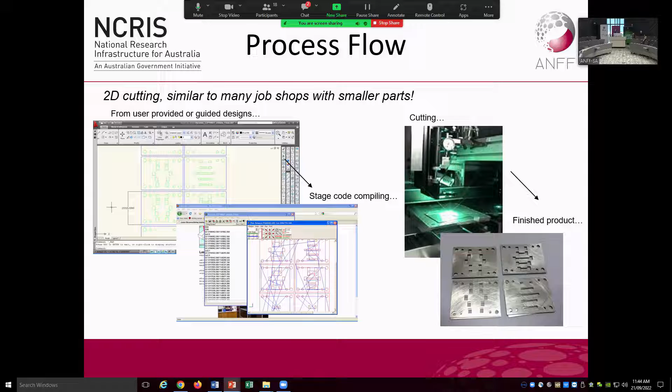Okay, so largely we will take 2D DXFs for our 2D process, and we will run them through a G-code converter. That's the language the machine can understand, and away we go. We can hit go on it. There are a few things we do.

The next step on that is to do 2.5D processing. This is sort of like the etching we talked about. Here's some examples where we've got some microfluidic prototypes. These were fairly large pillars that we were leaving behind in a fairly large channel. So that's an area where the laser can be helpful.

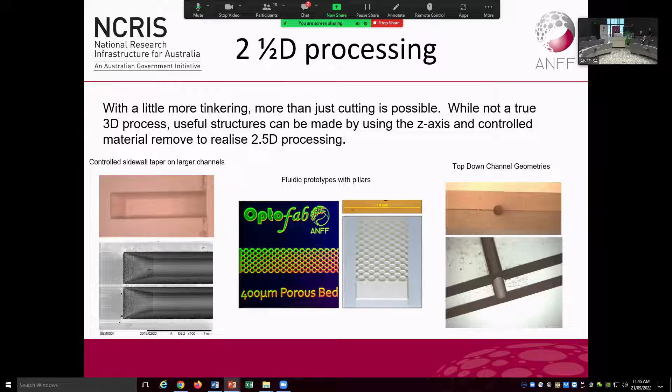As well, we can do sort of semi-3D stuff. So this was a pair of slides which was meant to have a cavity there to hold an optical fibre between them. So you can go into 2.5D processing.

I just have a very quick clip that I will hopefully be able to bring up flawlessly without an ad. What could you do with a metal 3D? All right, wait for the ad to skip. I just want to show a very quick clip on what 5-axis laser machining might look like and the sort of thing you can do with it.

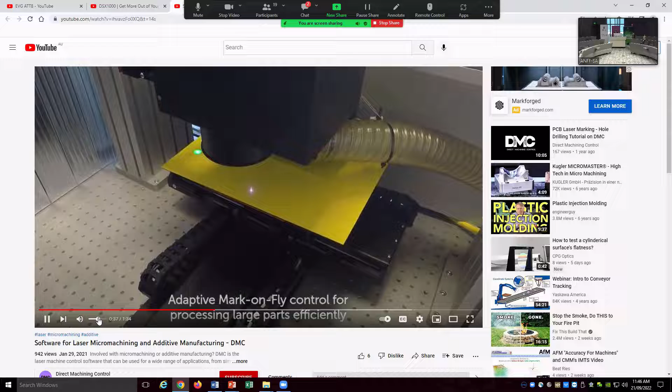So this is from a company that builds the control software for these machines, DMC, and this is sort of what it looks like. This is showing the 5-axis gimbal and rotation stage. When you get to doing processes like this, you actually end up in a CAD-CAM model which simulates the whole machine and process. So this is going to be a learning curve for me. I'll probably be comparing notes with Mark at some stage about how all this stuff is supposed to work.

But it gives you some idea of where we're going with this. So this will be our new machine next year, which will actually take us into true sort of 5-axis processing, where we can mark and raster and drill holes in parts, hopefully from any sort of attack point.

To make something that's very difficult to do otherwise in the clean room. You're going to go and visit Heike, and those of you who get to see David Lancaster's lab, I think that's Friday. You'll see more photonic stuff being done with lasers. We do this sort of stuff at Macquarie as well, but David's also very good at this, so I'd encourage you to go along to his lab tour on Friday to see more about what this is about.

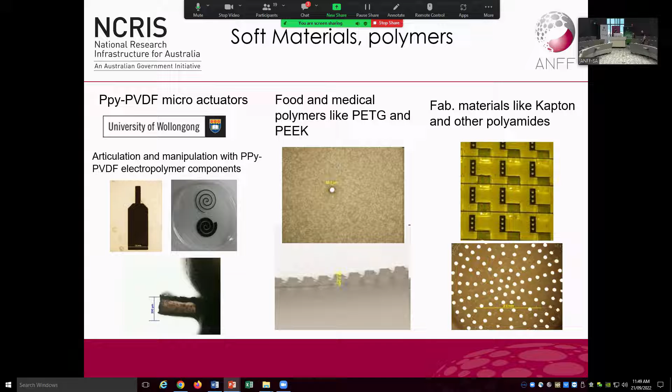Sorry guys, I'll be very quick now. Soft materials - we drill holes and cut features out of very soft materials, whether it's PVDF, which is a very soft gelatinous plastic, through to kaptons and things like that, which are often used in devices in clean rooms, as well as PEEK, a challenging material for catheters and things like that.

So I guess that's one of the other key messages with laser machining - that while there are some forces involved, it's much closer to a non-contact process than machining and things like that. And you certainly don't want to be taking your dirty coal samples into the clean room to do lithography on them.

So this is an example of maskless etching, but in a very novel material that you wouldn't want to play around with. The coal example, they were looking at microfluidics of coal seams under fracking conditions, which is very important when you're trying to demonstrate where all those nasty chemicals are going to go.

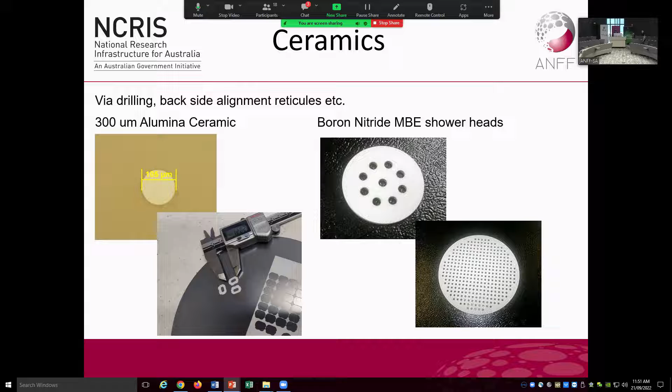We machine ceramics. Some of myself and Igor's first interactions was drilling via holes in ceramics for the guys in Edinburgh. These days we also cut small ceramic components for MicroX. We also work with challenging materials like boron nitride ceramics. It's very difficult to machine, hard on the tooling, but if the features aren't too demanding, we can do a lot of work in laser machining to get them by.

So one of the examples that I'll do quickly, what are we up to? 51, time's up, alright. Okay, have to be real quick then, because I'm keeping you from lunch at this point.

I'll just reiterate, enjoy your CAD practice this year, because that's the language when we're passing wafers around and we have to match different machines to them. CAD is really instrumental in being able to do that.

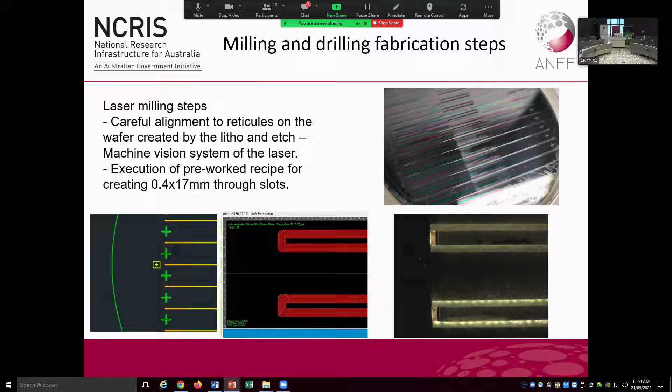I've run out of time, but I'll just say this is a very good company that's in your backyard. These guys are down at Flinders called Micro-X. They've been instrumental, we've been instrumental, in getting their current products off the ground. And this is where what I do becomes really real-world applicable, okay?

Micro-X makes X-ray tubes, and inside an X-ray tube, you need a high-voltage mesh to accelerate the electrons down the tube. It's a very challenging thing to do. The material needs to be very robust, so quite often it's tungsten, and tungsten's a very tough material to machine. You can see my pictures down the bottom, they're looking at very rapid iteration of their devices to try to get stuff into production.

That's where a facility like we can offer really makes companies like this get off the ground. The benefits of working with us is that we're local and responsive. Those guys are really happy when they can get something out of me in a couple of days, when they're waiting 6 to 8 weeks to get something out of Europe. We can be really flexible with the guys as they change their mind, whereas other suppliers tend to get quite annoyed if they're having to reiterate and reset a process all the time. So this is a real-world success story of the sort of stuff we've been able to do.

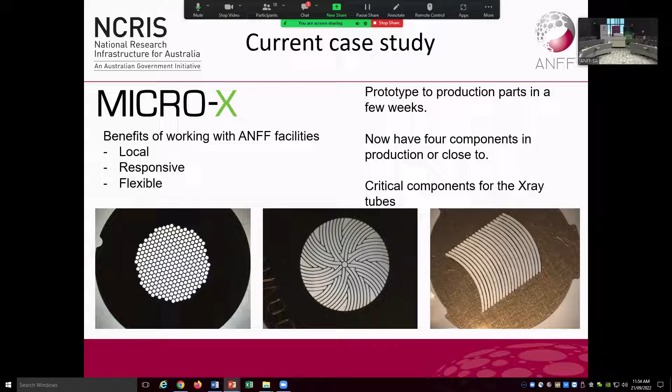This is a company that, as you guys go through your degrees and postdocs and everything else, if you get a chance to do an internship or get involved with Micro-X, hopefully they're going places, because they're taking a lot of Flinders students and a lot of other personnel from Adelaide and putting them into a really positive company.

I live up at the Hearing Hub at Macquarie University. There's my email. If you ever find yourself needing a via hole or a mask cut out of brass or something like that, you'll probably end up talking to me at some point. So thank you very much.